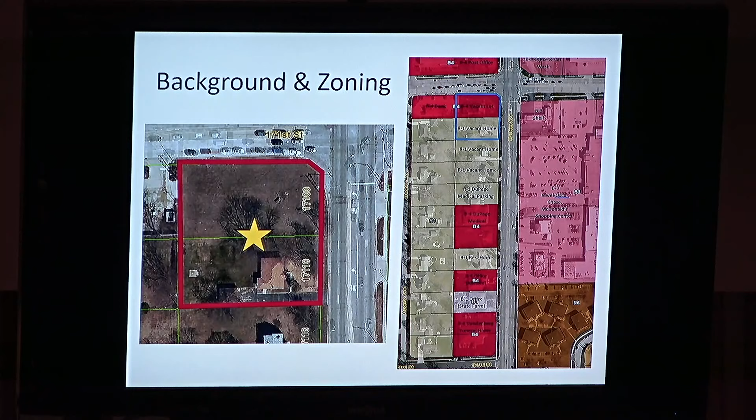The site's on the southwest corner of 171st and Harlem Avenue. It's across from the Shell that's right there, and then the Jewel Osco and the Jewel Osco Shopping Center. To the north of it is the post office, and to the south right now there are two vacant residential properties. To the west you have a bank and then a single family residential property as well.

To the north of it is zoned B4, the post office. To the west, the bank is zoned B4, the home is zoned R1, and then to the south of the lot, the vacant lots are zoned R1. To the east you have the Shell and the Jewel Osco, which are zoned B3, general business. And then to the northwest there are offices and a car wash zoned B3. So kind of a mix of zoning out there.

The developer's looking at the two lots furthest north. Currently, the owner that owns these lots also owns the two lots to the south as well. This property will end up having the one home demolished that's part of this property, and then the two homes to the south are also proposed to be demolished. They'll be restored with topsoil, seed, and blanket.

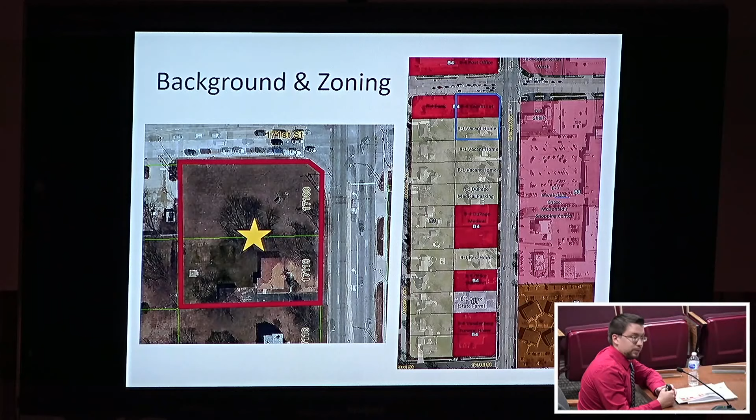The block that this gas station is looking to develop on was originally developed in the 1950s and 60s, with the subdivision to the west. It was developed with single-family homes along Harlem Avenue when it was a smaller, two-lane street, and that made more sense then. It's changed over time though, and become a fairly busy commercial corridor. Starting around the 1980s, those homes were being torn down and those lots converted to commercial uses because of their presence on Harlem Avenue. So they're a little bit difficult out there.

There's the Vandenberg Funeral Home, a State Farm building, an Allstate building, and DuPage Medical Group. It's been a mix of more office-type uses, but there's the funeral home as well, and there are still a couple residential lots out there. The one on this lot and the two to the south are still zoned residential, and there's one other lot mixed in further south of DuPage Medical Group, a residential lot that's currently occupied. It's just been in that transition.

It's really not the best place to have homes anymore, just because of the traffic, the emissions, noise, things like that. And it's got demand for some commercial because of the amount of traffic on Harlem Avenue. But there's still the issue that to the west are residential homes. So for the most part, these have developed as either B4 or B1.

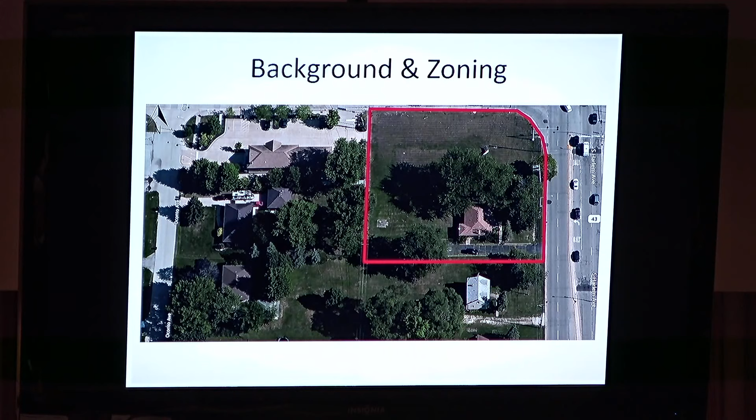So again, this is the property there with the one home, and then the vacant lot. It's two lots. The one furthest north along 171st Street did have an office building on it that was demolished in 2016. That had originally been moved there from somewhere else—it was like a transplanted office building to the site.

But that was demolished in 2016 after it was vacant for a number of years. And then the homes to the south have all been vacated at this point and are vacant.

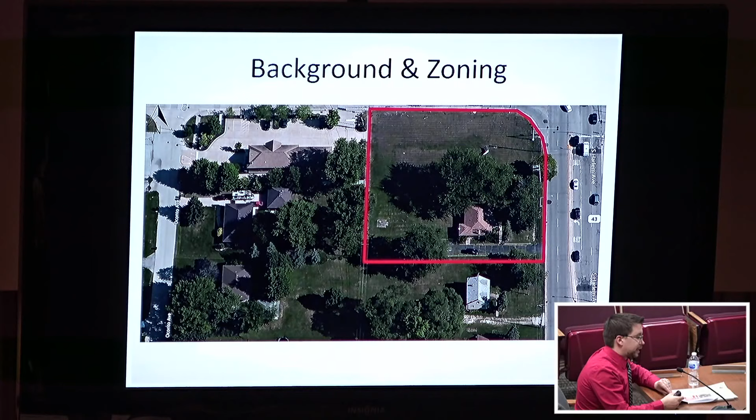Here's the existing site again out there. To the left of this is the home they would be demolishing as part of the 7-Eleven site. To the north is just a vacant lot now—they used to have that office building. And here are the two other homes to the south of this property that they're proposing to demolish.

Our original vision for this property and hope was that they could take all four of these parcels and master plan them, just so we knew they all worked together. This developer is just looking at these two parcels for the 7-Eleven, so we haven't really had them master plan the two parcels to the south, but they have, and I'll get into the cross-access in a little bit.

They planned for cross-access there, and they're also proposing to demolish the two homes that are back there, just to ensure those aren't going to be occupied as residential. Likely it's going to be something business or office related, similar to this, that would come into those properties. Our one open item is the condition that we're recommending those homes be demolished. I believe the petitioner agreed, and it's actually in their contract to purchase the property as well.

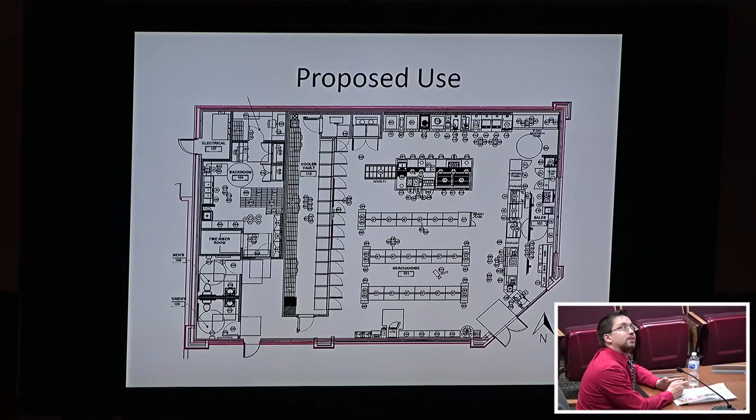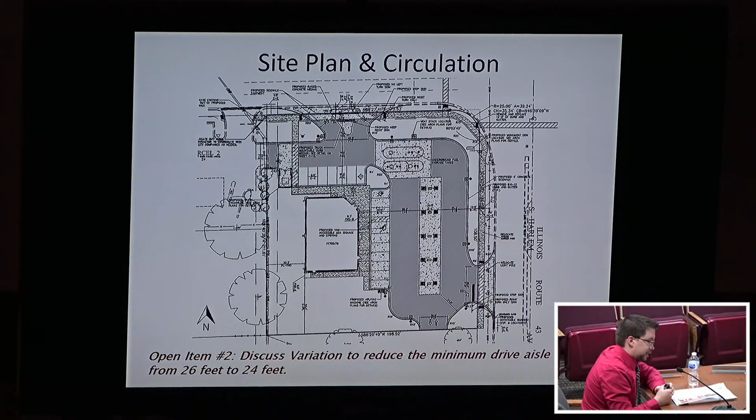It's a fairly tight site, so not too many gas stations can fit in these anymore, and they usually do a little bit bigger sites. But in this case, they've gone with what's been the standard previously for gas stations. So it is a little tight, but I'll get into truck turning templates in a little bit, because that's something that drove some of these designs on this site—can you get a fuel truck, can you get a fire truck to get in there and cycle through the site safely and effectively.

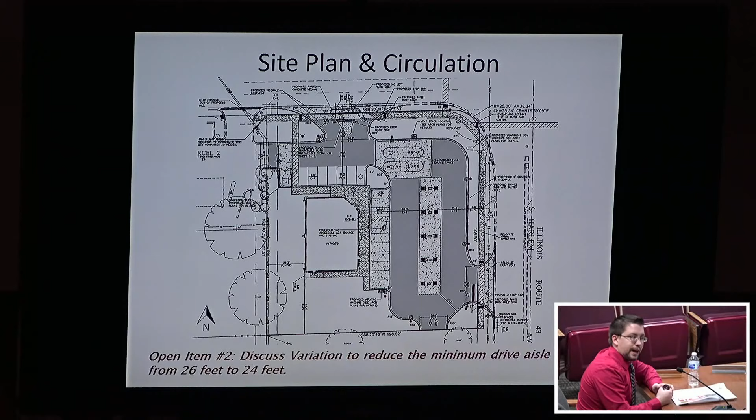The one thing they had to do to make everything work here was reduce our drive aisle width, which is 26 feet, to 24 feet. 26 feet is the village minimum that we have. A lot of other communities are 24, and staff and fire didn't really have too many concerns with reducing it to 24. Those are what you see in a lot of existing properties in Tinley, as well as in a lot of other communities—that's kind of the standard.

So we thought on this site it could work, and it's only really along the north side of this, where they align it with the property to the west, the bank property, where they have cross access—that's at 24 feet. So they've just connected into that.

Site circulation is one of the main concerns with any gas station, since it's got a lot of traffic flow going in and out. We had them focus on this along 171st Street, specifically how they get a fuel truck in and out through the site. You'll see that with the pork chop median along 171st Street, which is an odd angle, not your typical design, but we didn't want just a mountable median since we wanted more control of traffic coming in and out of the site. Some of it did need to be striped so the truck can make that turn in from 171st and come through the site.

In addition, there are public sidewalks that'll be installed that aren't out there right now, along Harlem and 171st Street. That meets our subdivision code requirements and will connect to the west. There's nothing to the south right now, so there are still a couple gaps there in Harlem, but hopefully as those properties to the south redevelop in the near future, those would have the sidewalk installed as well.

There are still some engineering comments we have to flush out here, as well as any IDOT controls, since IDOT controls Harlem Avenue and Cook County Department of Transportation controls 171st Street. So they may have some comments and corrections as well. We have an open item to add a recommended condition to the approval, subjecting the approval to final engineering.

From a parking and traffic perspective, that's one of the two main items we had them look into early on. Primarily the traffic at that intersection can be pretty busy. It's not the busiest in the village, but it doesn't really have dedicated turn lanes, so it can fill up a little quicker than some of the other major intersections we have.

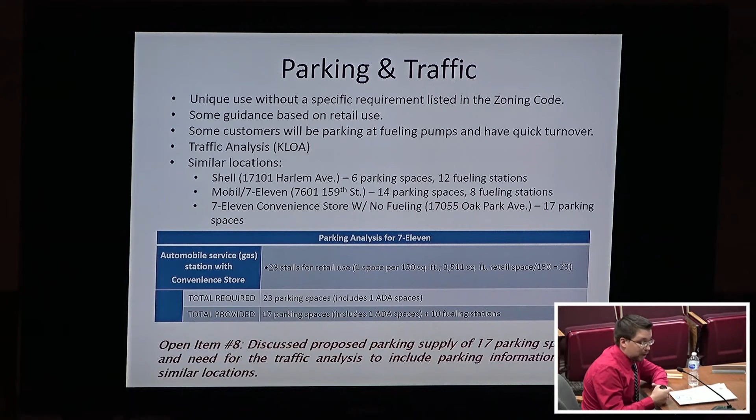There was also a history of traffic issues out here when there was a full access closer to the intersection on the office property. Then when the bank developed to the west of it, they moved the full access further west and away from the intersection as part of that project. We had them look into that quite a bit, and I can have them touch more on their traffic report and what their traffic consultant found out there.

What staff really pushed for was this: they originally came in with a full access on 171st. We didn't think that worked, not that close to the intersection and not that close to the other full access. So we worked through it to get them to the right-in, right-out design they have now, with raised curbing that would prevent vehicles from making turns they shouldn't, like trying to go north on Harlem from 171st Street, or other moves that could cause issues out there. We had to work through it quite a bit.

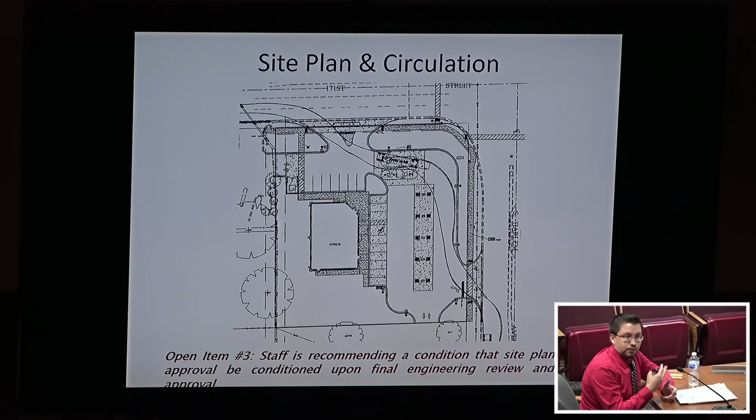Especially along 171st Street, but I think we got a plan here that Cook County Department of Transportation, our village engineer, and staff are fairly comfortable will control the traffic in and out. There is still cross-access to the west to the bank that was established when the bank originally developed, so passenger vehicles from this site will still be able to access the full access on that site as well.

The gas station use in terms of parking is a little unique. We don't have a specific code requirement for gas stations. With the food and fuel project that came before you the last couple meetings, and this one, we've picked the retail component in terms of the convenience store for parking demand. If you do that, it leads you to 23 stalls required on this site. Again, it's not a use that's specifically called out, so it's left to you, the plan commission, to analyze this.

It is fairly unique as a gas station because a lot of those retail customers are also customers fueling up their cars. The 17 parking stalls they've supplied don't include the 10 fueling station stalls. Typically if it was just considered a retail store, they'd need 23 stalls. They've supplied 17, but they also have those 10 fueling stations.

There's also some fairly quick turnover in terms of the customers here. Compared to a typical retail store where people are stopping, staying, shopping, this is pretty quick in and out. So there's quite a bit of turnover that helps the parking situation.

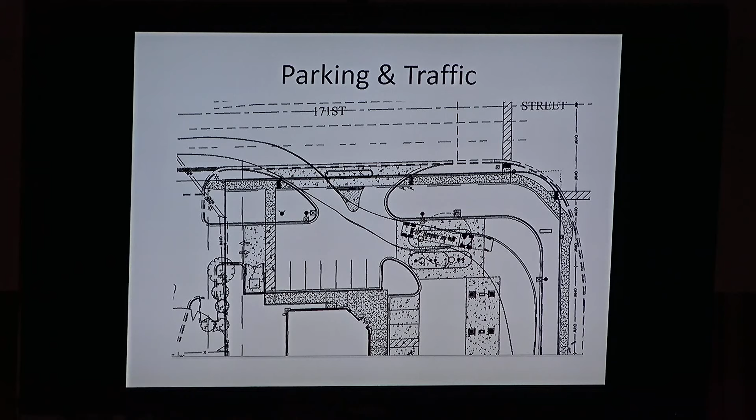So parking, I think we just went into that. Traffic-wise, the trucks that come through the site would come in on 171st Street, cycle through, and then leave going southbound on Harlem Avenue. So it's kind of tight through the site, but it functions to get a fuel truck in and out of there.

There's a specific design to that pork chop on 171st Street that is curbed, so you can't have cars making lefts onto 171st Street or making turns they shouldn't. Not that they can't still, we've all seen people do it, but this at least helps deter that as much as possible.

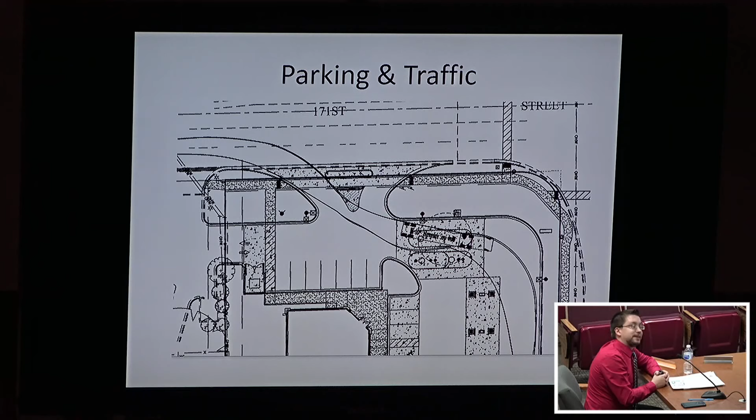Landscaping-wise, it's generally in conformance, but there are some deficiencies in what they proposed. There are some buffer yard shortages, and there's also no parkway trees. There's not really a parkway out there due to the number of expansions on Harlem, so it's fairly limited. Our landscape architect, as well as IDOT and Cook County, have kind of said you don't really want trees in a space that small, especially that close to major roads like that.

So they've covered their trees that are on their site for the most part, but they are still missing those parkway trees. And then the same thing as with the food and fuel, we had an issue with landscaping the interior of the site.

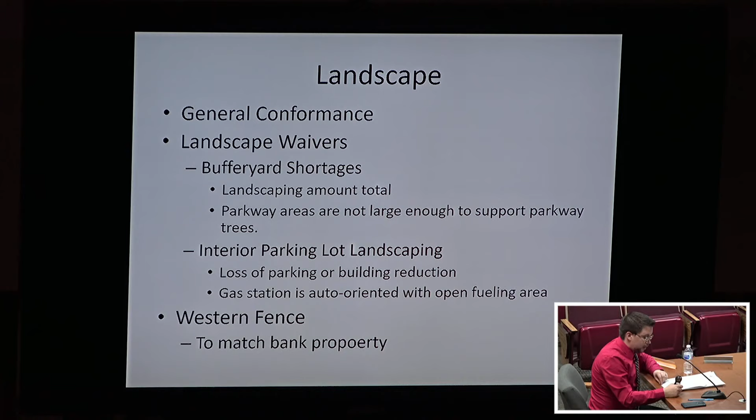With a gas station that's hard because you have a pretty large fuel area that you can't really get landscape islands into very well, since you have vehicles turning different directions, a lot of different vehicle movements, truck movements through the site that you need to accomplish. I like our landscape code in a lot of ways, but it doesn't necessarily work for every use, and this is an auto-oriented use that's kind of hard to get that interior lot down to.

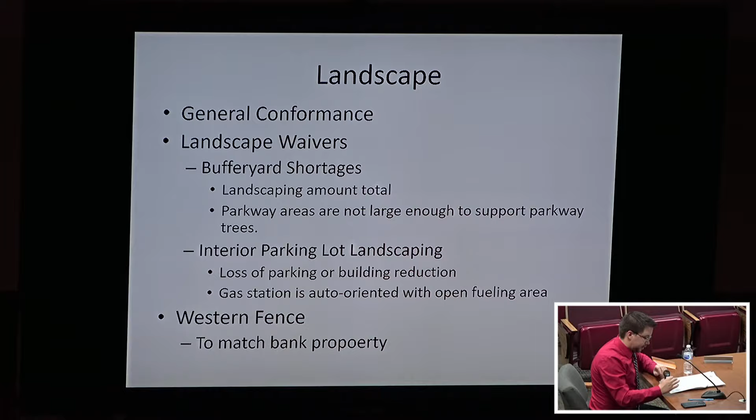Lastly, there's also a fence that runs along the west. To the west of this is the bank property, which it'll connect to, and then there's also single-family residences there, so they would have a matching fence there. I believe the plans have it at a 6-foot fence, but the bank fence is actually at 8 feet, so that's one open item for them to adjust in the plans.

I think their intention was to match the bank fence, so that might have just been an error. I can have them speak to that, but they'd have an 8-foot fence that matches the color and style of the bank fence, just to keep that style going down for the residents that abut those two properties.

We did have our consultant take a look at this, and there are some deficiencies here. It is a tight site, though, and a gas station limits what they can do, but he did have a couple recommendations for the petitioner to help offset some of that.

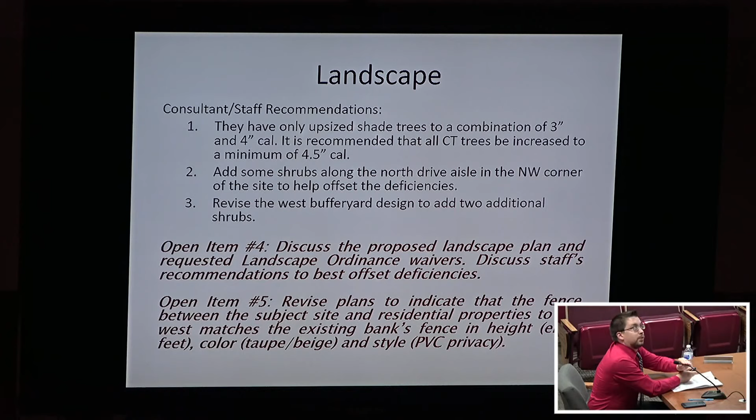That includes upgrading the caliper of the trees to 4.5 inches, adding shrubs along the north drive aisle, which is bubbled out here on this image, and then revising the west buffer yard design to add the 2 shrubs.

Yeah, the 2 trees and the shrubs on the west side that are missing there. So they have an ability to stagger the trees or regroup the trees or add some of that landscaping in, the shrubs under the trees. They have an ability to fit those in there, but they may just need to adjust the plan a little bit on the west side.

Besides the traffic and the parking concerns that we had for the petitioner, obviously the other concern is the residential to the west of this, and making sure they get buffered.

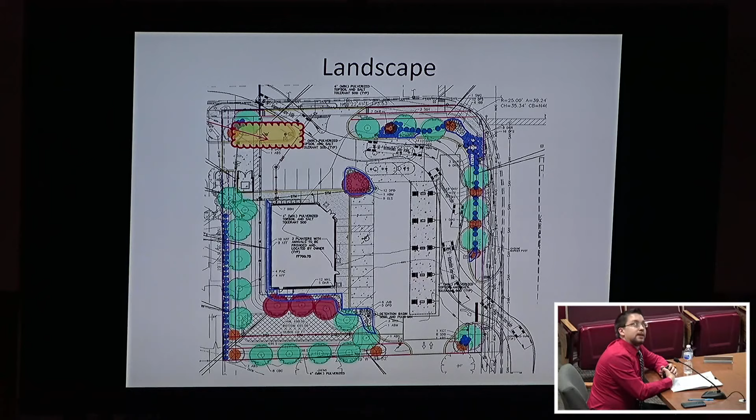A gas station's not the best thing, but if you buffer it and design the site right, you can mitigate some of the negatives. So we had them focus early on the landscape plan and the lighting plan. Making sure this looks good for the residents to the west of the site, they created a significant berm. There's a detention pond and other areas there to buffer the convenience store, as well as a lack of a drive aisle.

The original plans included a car wash on the property to the south of the convenience store. They were originally going to look for a B3 use there, but we worked with them and got the car wash removed due to the noise as well as the drive aisle that would have been there. They added additional landscaping to help buffer the site and make it work with the residential to the west as well as the lighter commercial to the south.

So we have open items just discussing the landscape recommendations as well as the fence revisions we need on the plans to show up matching the bank fence.

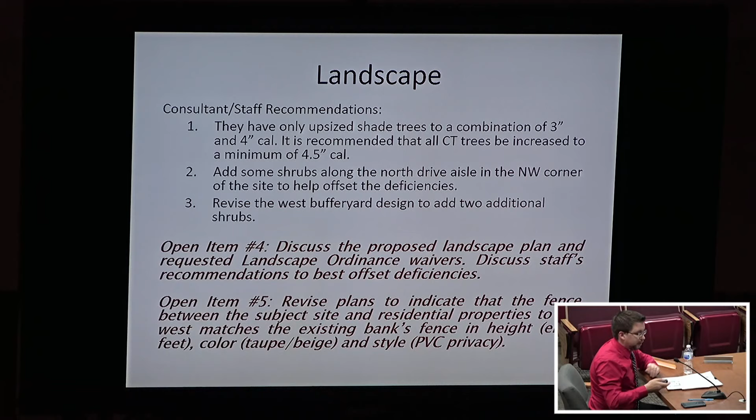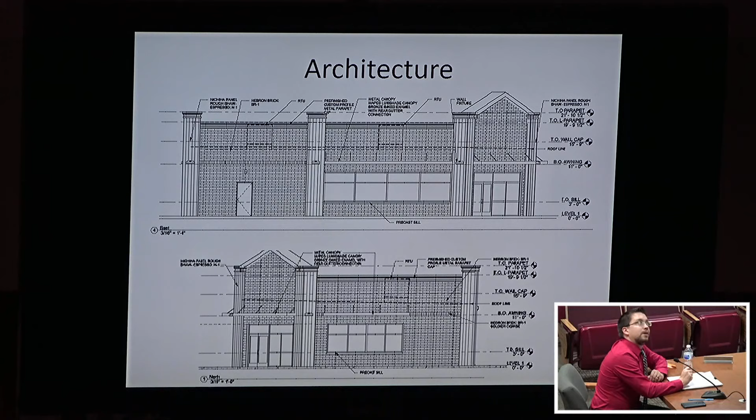Architecturally it's not super exciting because it's a gas station. It's similar to Lenny's — not necessarily in our downtown, but still a good looking building. They used fairly high quality materials here with a lot of face brick that meets all our masonry requirements, as well as windows and other architectural treatments.

They created some color renderings of it — the main corner parapet there. Staff originally recommended that the petitioner look into a roof element or some kind of residential roof element on the property. There is a corporate image that they're going with here.

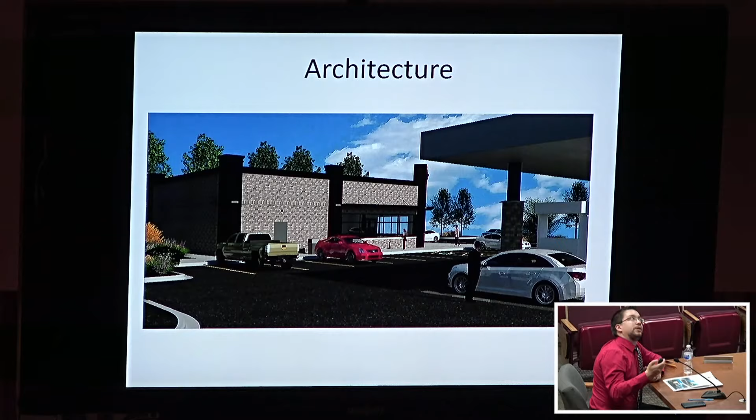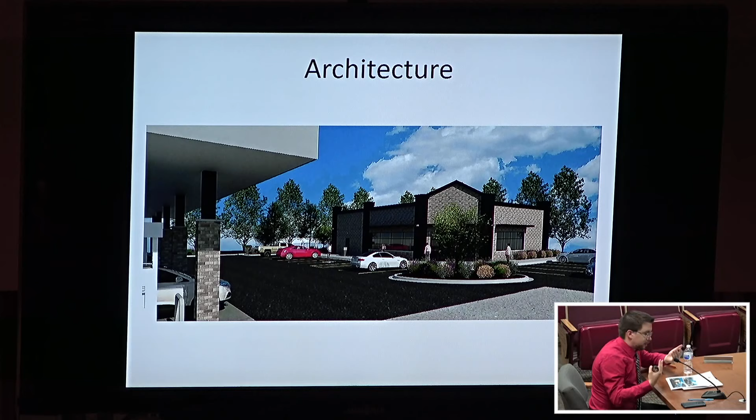So we do have an open item to review the architectural design on this. If you guys have any opinions on the roof element or anything — typically it's flat, so in this one you get the flat across the top on that main entrance.

They also have the canopy, so the canopy matches. They bring the brick up the majority of the canopy supports, and then they have the black canopy top. They also have canopies that go over the windows there.

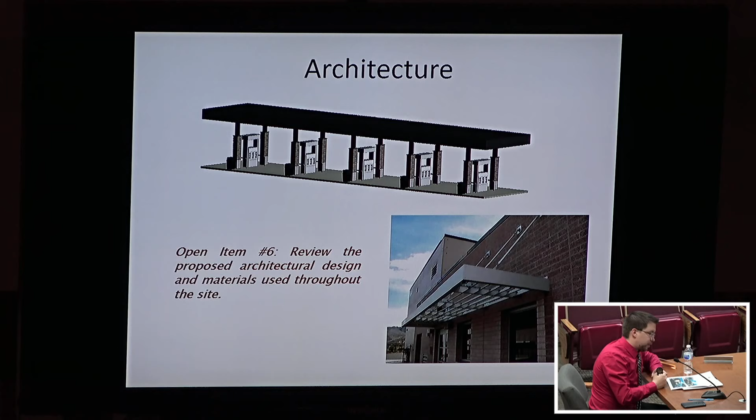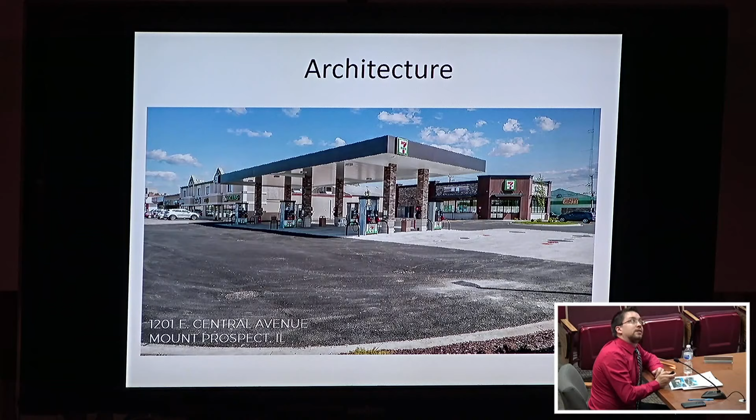Here's what they're looking to do on this property, similar to the one on Mount Prospect — that's got brick, fiber cement board, and other details on the building. And then those similar canopy elements, similar landscaping, and similar size on this site as well. Actually it's a little bit smaller, I believe, in terms of the parking and the size of the site than the one we're working on.

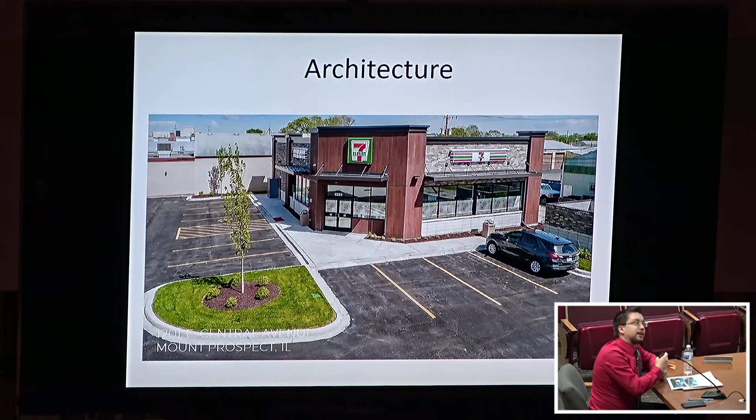Signage-wise, they decided to leave the signage up to the end user, 7-Eleven, but have them meet the code coming in. But we did have them address at least the ground sign, knowing that this is a pretty tight site and that there likely wasn't going to be enough space to fit that sign in where they want it, and also meet the setback.

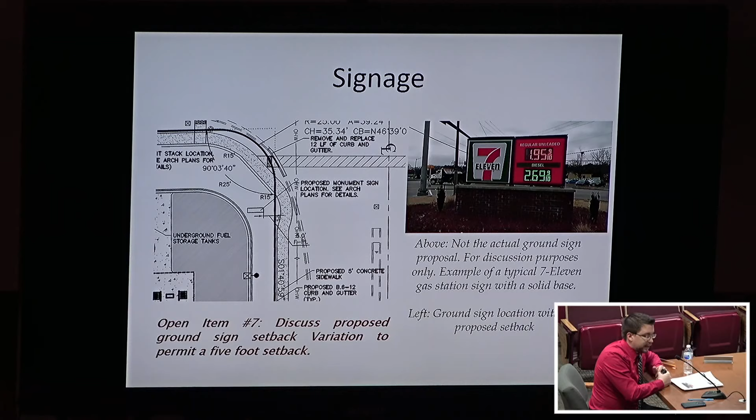Lighting is the other thing, especially with the properties to the west that we were concerned about. We didn't want the neighboring residential to see any glare or off-site light, so they've worked on that extensively with their lighting contractor from the beginning, and no light goes to the west off-site.

Been meeting our new lighting ordinance that went into effect a couple months ago, so there's 0 spillage at those lot lines. It does go up a little bit along Harlem Avenue and 171st, which is allowed, but it's got to be below 2-foot candles. All of the lights on the site are downcast, full cutoff.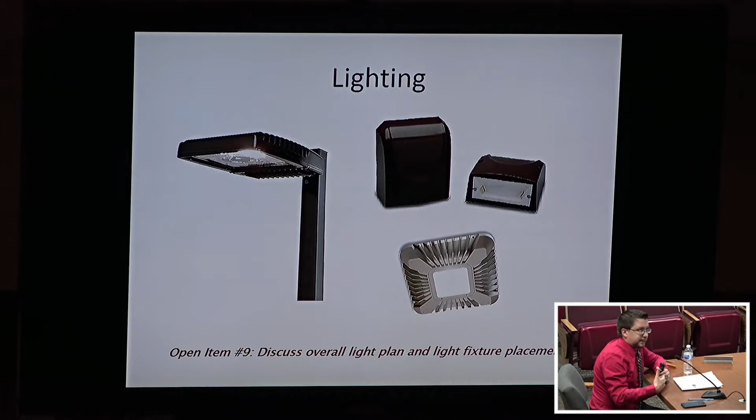So you can't really see the actual lens or bulb, the light source, from very far. The light fixtures are 20 feet pole height. The majority of the locations were chosen so that, between the building buffering and the landscaping, you're not going to really see those poles to the west of this property. They've worked on buffering those as best as possible.

This property requires rezoning. Currently the lot to the north is B4 office, and the southern lot is zoned R1 residential. They're proposing to rezone those to B1, which allows for a special use for a gas station and convenience store. They were originally thinking B3, but between staff comments and discussion, they amended it to B1 and pulled out the car wash.

And that goes along with an existing B1 on Harlem. I believe the State Farm building is on B1.

Due to the rezoning and the plat consolidating the lots, the B1 zoning district requirements are typically for bigger lots than this, so it's a challenge when you're changing from residential lots to commercial lots. Typically we want to see bigger lots develop for commercial, with some depth, to provide those buffers. But for anything going into these sites, which is likely to be commercial...

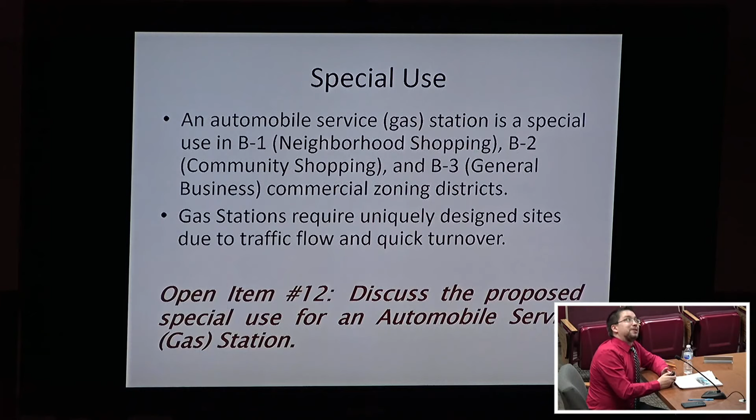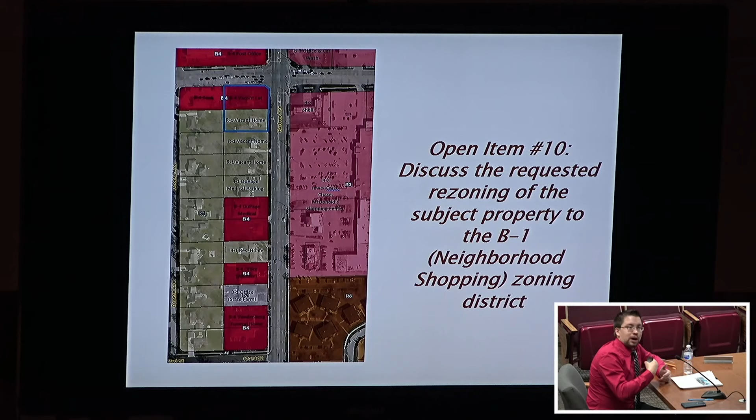Preferably that would have been done all the way down Harlem Avenue, and you wouldn't have all of those curb cuts for every single commercial site, but hindsight's 20/20. So for what we have now, at least these 4 properties will, 5 if you include the bank, all be connected.

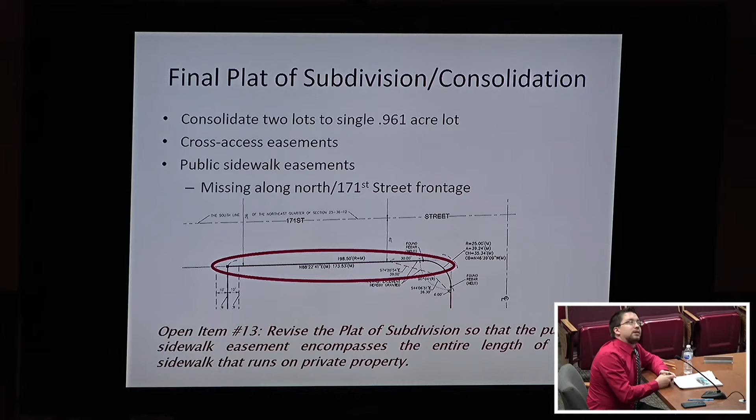So I believe that's it. Again, the last open item was the public sidewalk easement. Because of the width of the parkway, the sidewalks could have been installed in the parkway, but they would have been like carriage walks right on 171st Street. That's actually how the bank designed theirs, and it's obviously not preferred from a safety standpoint, and it ends up with light poles in weird locations. So they pushed the sidewalk into this property, onto the private property, but there needs to be easements in place so we can maintain it going forward. They did it on the corner, but it's kind of short in easement on the north property line that they'll have to revise.

That's it for me, so if you guys have questions, or if you want to allow the petitioner to come up and finish the presentation, if there's any details they want to cover in particular or anything left out, please do so now.

That was a very extensive presentation. Dan's pretty good at that.

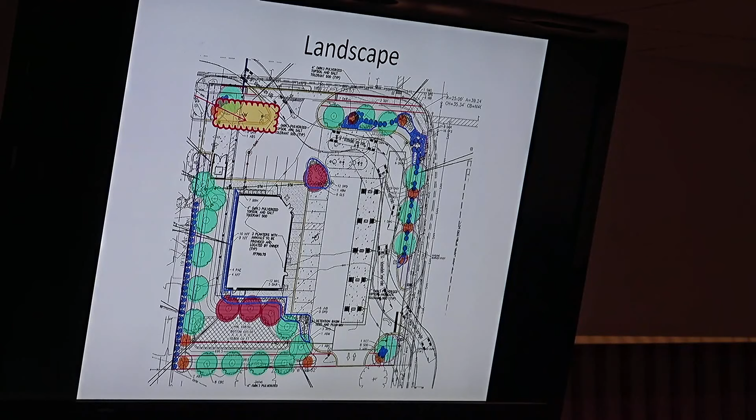What was it you were looking at, was it the back row along the property there, behind the store? Yeah, so there's a couple ones on the west side, they're short, just a few, like one tree and a couple shrubs. It takes a little maneuvering of the trees out there now, so you want to space them closer together and get another one in there, and then some additional shrubs. They have an ability to meet the code in that situation, we think. So their landscape architect can probably make that work.

And then to the north side as well, they have an empty space there, they have a deficiency but they can meet it. Besides those two, it's just kind of upsizing trees that go around the site because we don't have an ability to do parkway trees. At least when they go in, it helps the buffer. We would certainly have our landscape architect reach a final agreement with the village's landscape architect.

What the engineers told me is that in some cases, bigger is not better, and that's from a survivability point of view. He feels 4-inch is about the maximum we could go, and it's not because of cost, it's not that much difference. But the bigger the tree, the bigger the ball, the more problematic it is moving it, and the more likely it's just not going to do well. But those are kind of details that we let the landscape experts work out between them, and I think it'll get done in a way that's satisfactory to everybody.

Yeah, and I've heard that too, at a certain point you get too big and the survivability kind of falls off from that point. I don't know what that point is, and I have a call into our landscape consultant, so we can have them talk it out. I think the difference between 4 inches and 4.5, if 4 is what they feel comfortable with, we'll talk with our consultant. But I think if all these went in at 4 inches, we can make that work. So I can follow up with you guys afterwards on that.